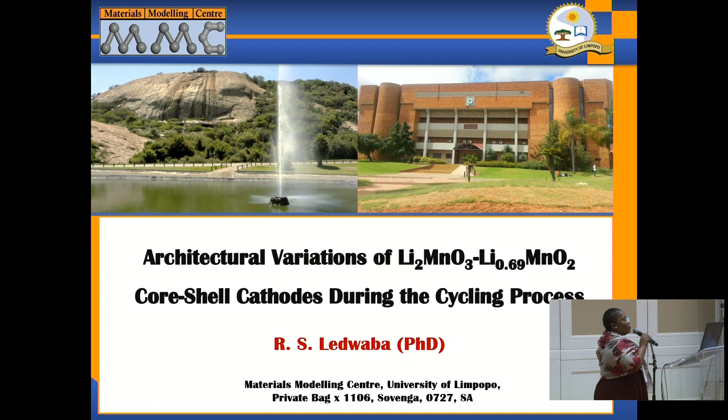A very good afternoon, ladies and gentlemen. Standing before you is Raesibe Ledwaba from the University of Limpopo Materials Modeling Center. And today I will be giving a talk about the architectural variation of our lithium manganese oxide-based core shell cathodes during the cycling process.

Does this move? Okay.

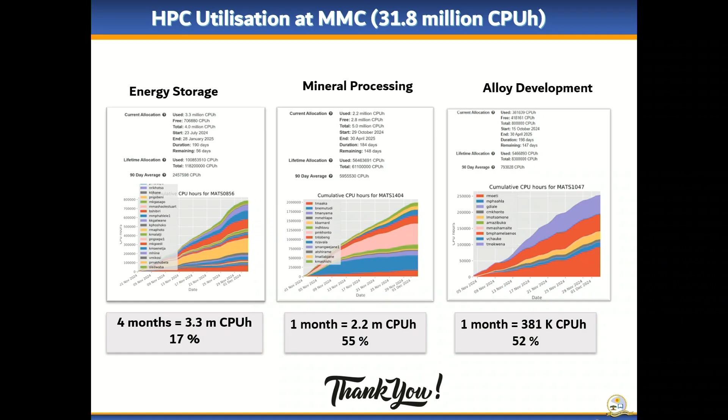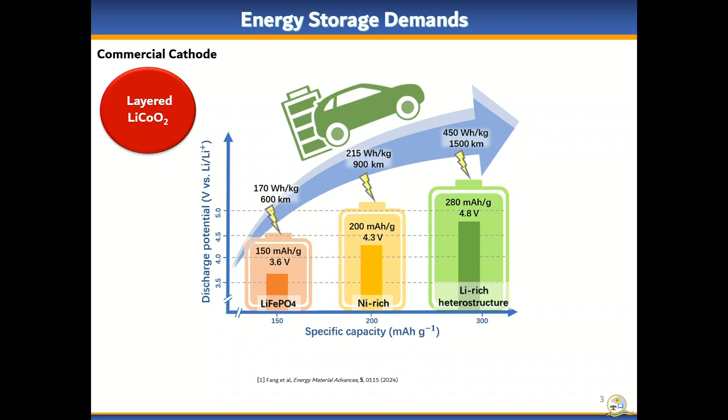But in the same sense, we have issues with all of these cathode materials, and we are trying to get in line with the development. So firstly, I want us to look at a very common cathode material, which is the lithium cobalt oxide, which is a layered structured cathode material. And the challenge with this material is that it has a very low capacity that it delivers. And this is due to some of the surface reactions and structural instability.

On the other hand, we are working on the layered Li2MnO3 cathode material, and this has a potential to deliver about 459 milliampere hours per gram. But the issue now with our candidate material is that it suffers from irreversible capacity loss, meaning that when it charges and discharges, if it goes at 459, it comes back at around 44%, so probably around 200, which is something that we do not desire.

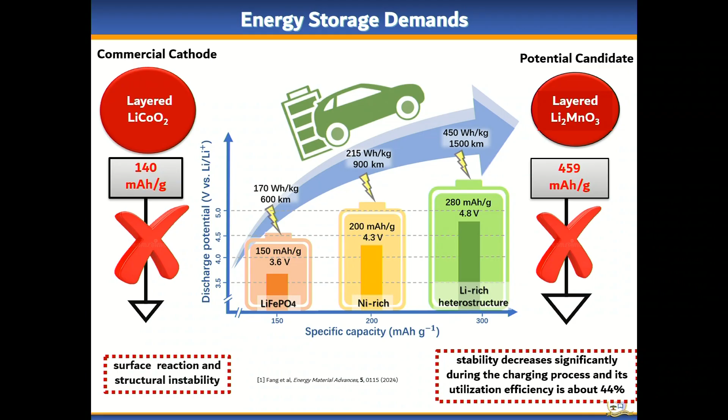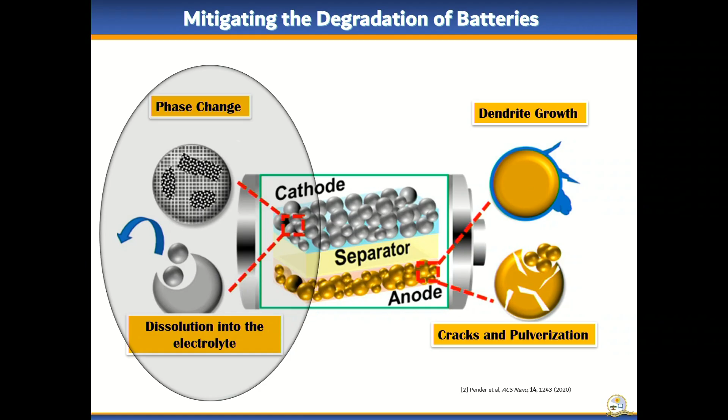So in the midst of everything, there are various challenges that are common in electrode materials, and these include structural changes, which are the phase changes demonstrated there. The phase changes also lead into some form of dissolution of transition metals into the electrolyte. We also have dendrite growth as well as cracks. These are just a few of the issues that are encountered in lithium-ion batteries. But for the purpose of this talk, I'm going to be only looking into the gray area over there, where we're trying to address the phase change in our cathode material, as well as the ultimate dissolution into the electrolyte.

So over here we demonstrate what happens during the phase transition. Basically, during the charging process, the lithium ion is removed from its original site and transferred through the electrolyte into the anode. And normally where there is a vacancy, the lithium that is transported leaves with the oxygen, and this is something we do not desire, because after this we have vacancies. As you can see, these are vacancies formed when we remove the lithium.

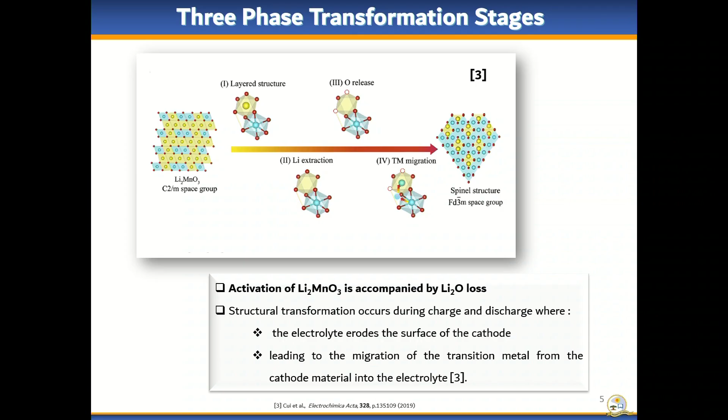So what happens is that the manganese, which is this in blue, now gets attracted to move to this position and forms a tetrahedral coordination instead of an octahedral coordination. And this actually blocks the pathways within the layered cathode materials and starts forming a spinel type structure.

So there are several approaches that have been suggested in order to remedy these issues. Some of these are surface coating, elemental doping, and structural design. With structural design, it's a matter of trying to modify the different morphologies. You can work on nanomaterials with different morphologies there.

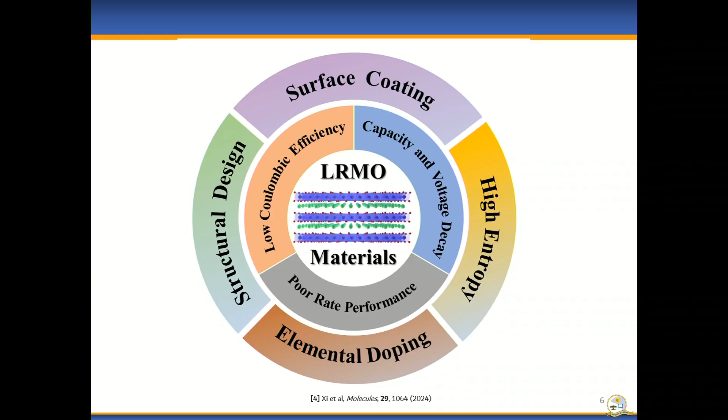So before we move on to the main business of the day, I just wanted to show that we've attempted elemental doping. This was a PhD study by Dr. Morashwa. What she did first, she did the charging process of the pure Li2MnO3 cathode material. And during this, she was able to demonstrate that there is indeed a layer to spinel transformation.

And to try and remedy this, she used sodium as a dopant. Basically, sodium, because it has a larger radius, is able to enhance the interlayer spacing. It increases the spacing such that the bonds between the manganese and the oxygens are much stronger, and the manganese do not migrate to the lithium sites.

So from that study, she was able to identify the optimal sodium concentration, which was 1.25%, and this yielded the lowest activation energy, meaning that this is the energy that is required for the lithium ion migration. And in turn, this works on the diffusion coefficient. So at that 1.25 concentration, we are able to obtain higher diffusion coefficients.

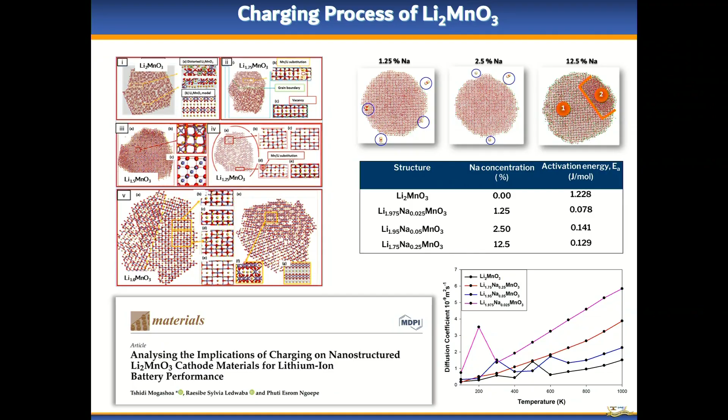So another one on elemental doping was an MSc study done by Mamonamane Mphahlele, who's also in the room. And during the study, she used cluster expansion, where she was able to come up with new stable phases. And from the most stable phases, we were able to identify that the band gap was actually modified from the original band gap of the semiconducting material.

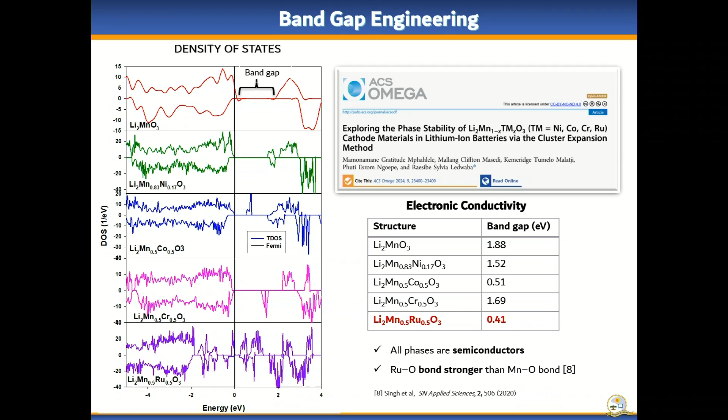We're able to reduce the band gap, and the lithium manganese ruthenium oxide system actually has the lowest band gap, and this means that it conducts better than the parent structure. And when we looked into literature, we found that the ruthenium and oxygen actually bond much stronger than the manganese and oxygen. And this gave us even better explanation onto what is happening.

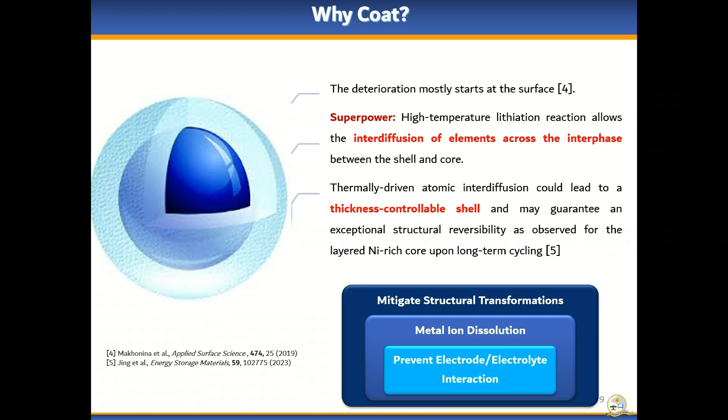So coming to what we're trying to do in the current study, this is from an MSc study by Precious Makubela. She could not be with us, so I'm presenting the talk on her behalf, actually. So what happens is that we decided to coat our materials because we know that the deterioration of the cathode material begins at the surface.

So what has been observed in previous studies is that the core shell systems have a superpower, that is, they allow for interdiffusion of elements between the core and the shell instead of elemental loss into the electrolyte. And this can also assist by controlling the thickness of the shell material, where you are able to sustain the structural stability of your cathode material.

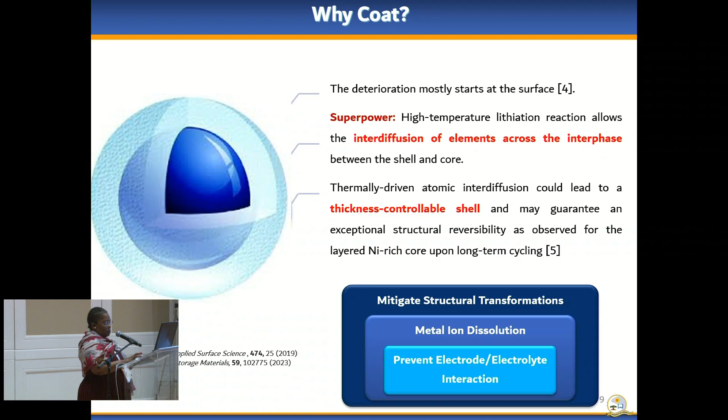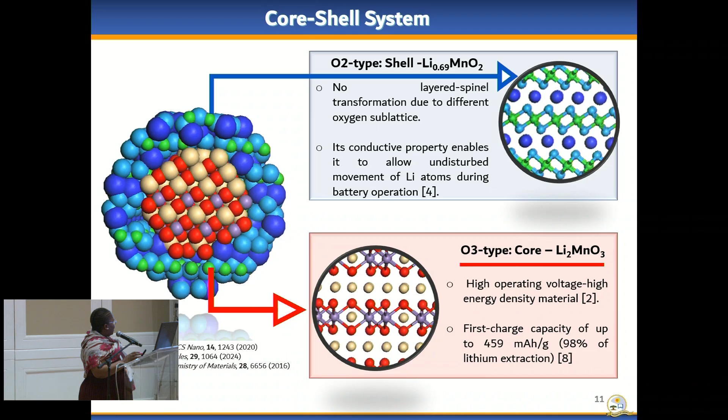So in this study, we are looking into a new type of shell material, which is the O2 type material. And this is special in such a way that amongst the different lithium manganese oxide layer structures, it is the only one so far that does not undergo a layer to spinel transition. So we are going for this material to see if it can remedy the issues that I mentioned.

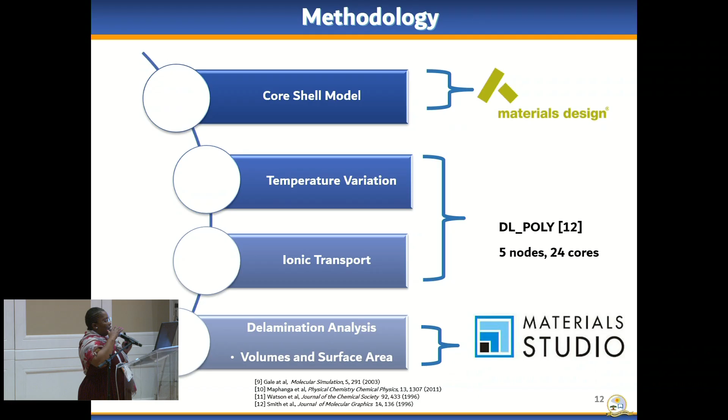In terms of methodology, we designed the core shell using Materials Design, and the molecular dynamic simulations were carried out using DL_POLY at CHPC. Then we did a bit of delamination analysis. So this is where we check whether the core and the shell are not dissociating from each other during the cycling process.

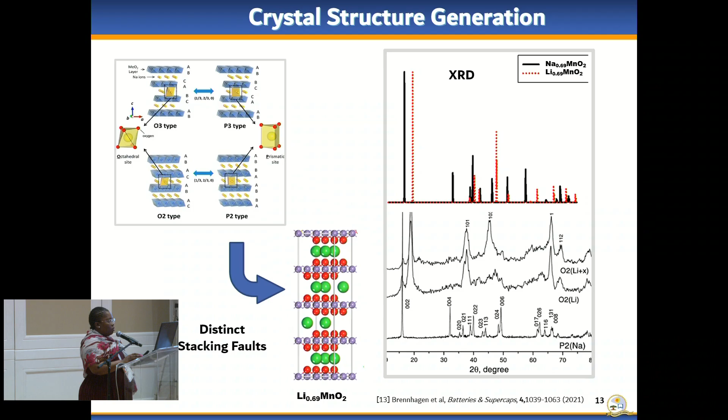Then the crucial thing here is that the O2 type structure is not found in nature, so it is a metastable structure that has different stacking order as compared to the O3, P3, P2 type structures. So we designed it computationally. And then on the right there, we have the XRDs to confirm the phase. So this is the sodium phase, and then this is the lithium phase. So that way we're able to confirm the O2 type formation.

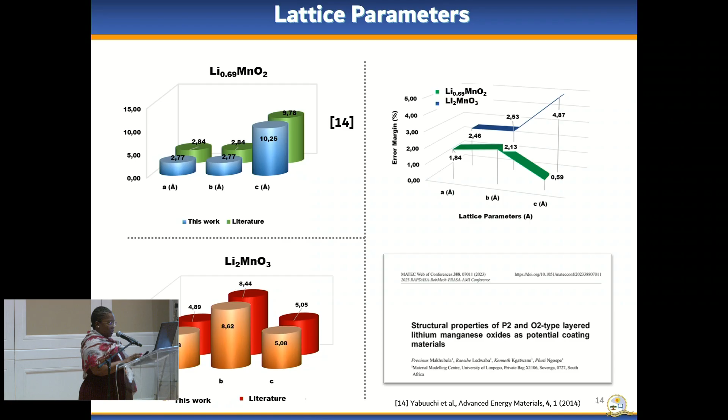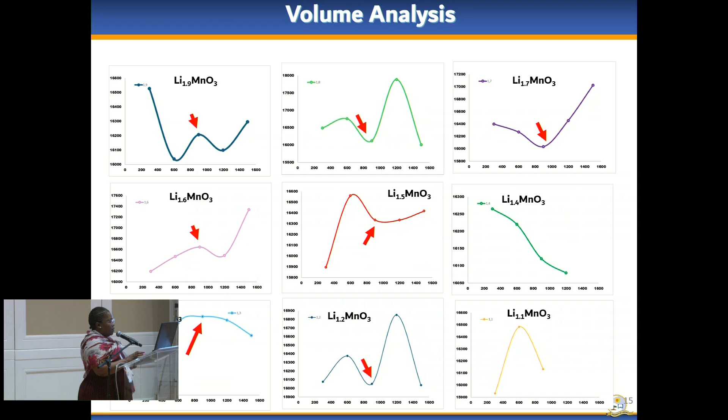In terms of lattice parameters, we did DFT work on both the core and the shell, and we found that the error margin for our lattice parameters is within 5%, which was a very good agreement. Then we proceeded to do molecular dynamic simulations, and here we're showing the volumetric analysis, during which we found that there was one particular temperature during which a lot of fluctuations were happening, and this was around 900 Kelvin. But we couldn't figure out exactly what is happening, because this was occurring in all the different concentrations from Li1.9 all the way up to Li1.1.

Then we also analyzed the ionic properties, which are our diffusion coefficients. And in this as well, we saw that there are a lot of fluctuations and couldn't really conclude on the trends of what is happening here. But more importantly, when we were checking the diffusion coefficients, we found that the concentration that possesses the highest diffusion is the Li1.7MnO3, which is about 3 nanometers squared per second.

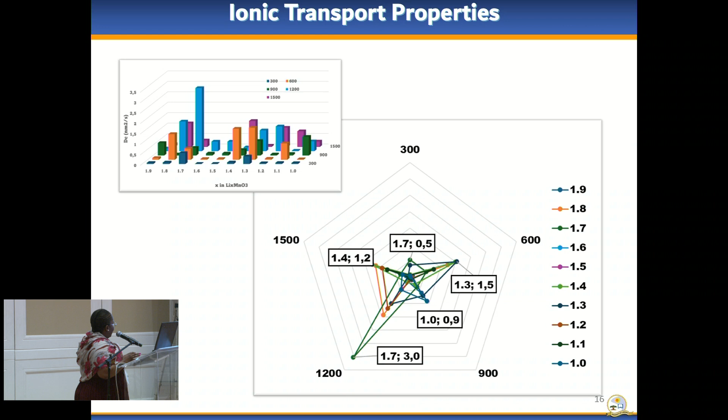We then chose a concentration that we wanted to sample on, and it had to be specifically one that has these kinds of fluctuations, because we wanted to see if there was any relationship between the trends in diffusion coefficients and the occupied volume as well as the exposed surface area of our cathode core shell material.

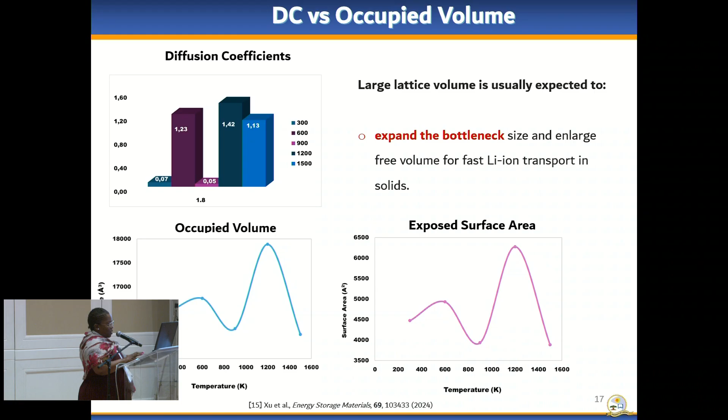And we found that there seems to be some form of relationship, because we have a peak here and then it drops and then it goes up again. And this is exactly what we're seeing with the occupied volume and the exposed surface area of our core shell material. So what we opted to do was to visualize the core shell structures at different temperatures.

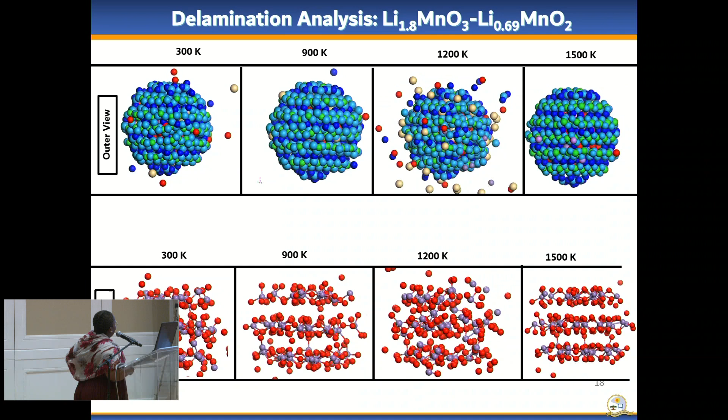So basically what we saw is that the shell material remains intact, and then these atoms are coming out from the core, going back at 900, coming out again at 1.2, then it looks more stable again here. So when we looked at the composition of the core alone, this is the Li2MnO3. In this case, it will be the Li1.8, because we are charging it. So here we have a structure that looks ordered.

These are the manganese and oxygen layers. And then this is normally where the lithiums are, so we removed them for clarity. Then at 900, it looks intact again. Then at 1.2, it seems a bit dissociated, with some manganese migrating onto the lithium layer.

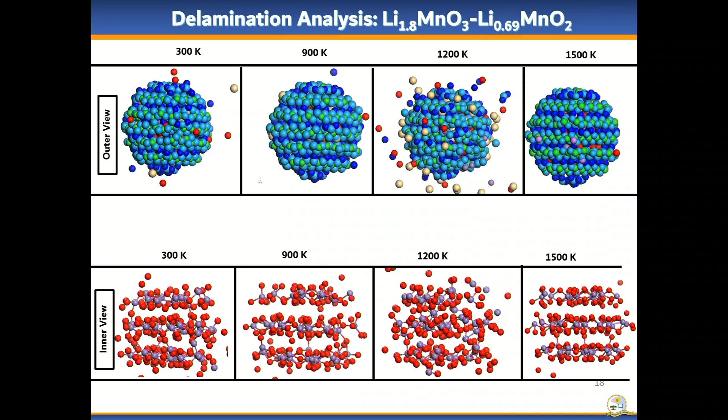But the interesting thing is what we saw at 1.5, where we were able to retain the structural integrity again for our core material. And this is something that we really desire, and we are yet to evaluate when it comes to other concentrations. Then here, we ran our core system alone, and we wanted to see what kind of structural changes it undergoes.

And we see that there's gradual, starting from 300 already, manganese migrating into the lithium layer and forming a tetrahedral coordination. And this goes on, and we start seeing some dissociation in our systems. And at 1.5, we see that the structure becomes more disordered. But this one is similar to the one above, where we have the shell, which actually does the interdiffusion between the core and the shell for the atoms. Then we are able to retain our structure.

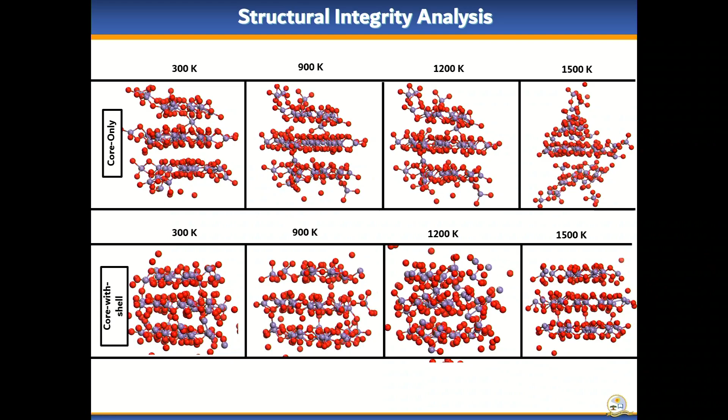And another thing, in terms of the temperature, we found that because this is a metastable structure, it cannot be obtained at temperatures greater than 600. So maybe this can explain what is happening there at 900. But this is some preliminary PhD work, so we'll still look into what is really happening there.

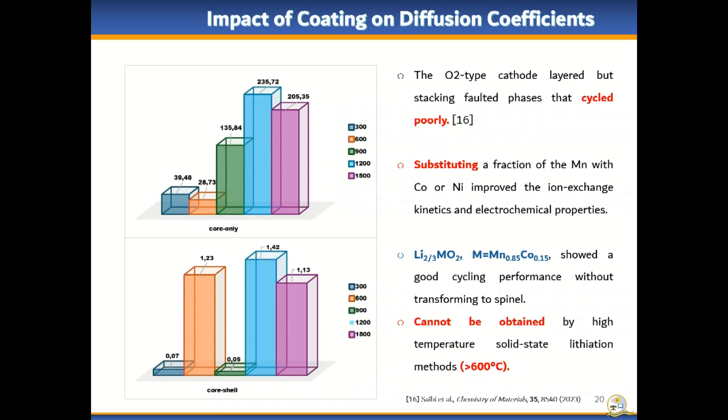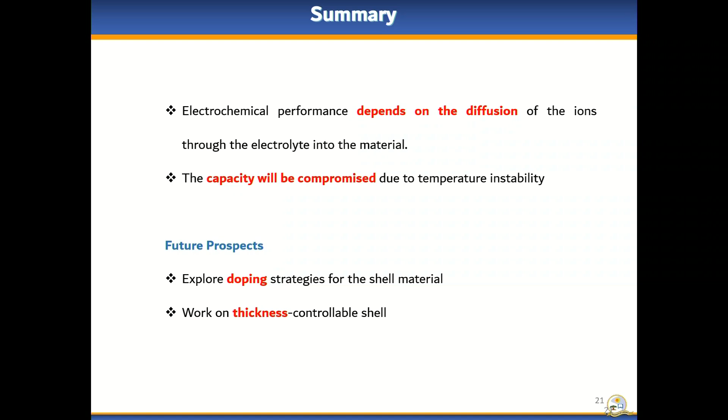So in summary, we noticed that the electrochemical performance depends on the diffusion of ions, and we have to make sure that we enhance the diffusion of our material, and this will help us so that the capacity is not compromised. So we are looking into doing some elemental doping on our shell material, and also work on the slab thickness of our shell material.